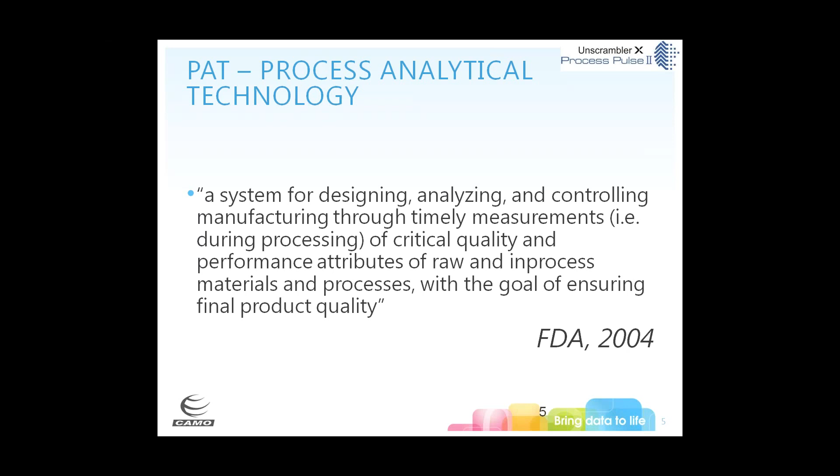If we look at that definition, it is actually quite wide, because it's saying that we are going to control both the process and our input materials and look at them as we are doing our processing. So if we try to make a picture out of this, this is how it can look. We have our process, which could be anything really. It depends on your industry, on your context. Into that process, we have one or more input variables going in, raw materials. The process is happening, and it could be heating, mixing, whatever it is. And that is, of course, influenced by your process parameters, in addition to any environmental factors.

And as the process then is progressing, we will get an output result or a product, and that product is really what we are interested in, because that is what we can sell on or pass on to our customers. And of course, then it's key that that output product has the right quality. And right quality, it could be anything. It could be purity, it could be something about consistency, it could be surface properties. It really depends on what you're making here.

But during this processing here, we obviously want to measure. We want to have some sort of data which is telling us about what's going on. And those measurements, they could be on the raw materials themselves, or it can be on the processing vessel. And using those measurements, we then want to have a handle on the quality, which means that we want to control the process and also to some extent have awareness of what is the quality of our raw materials, so we can actually adjust the process to ensure that the output quality is right.

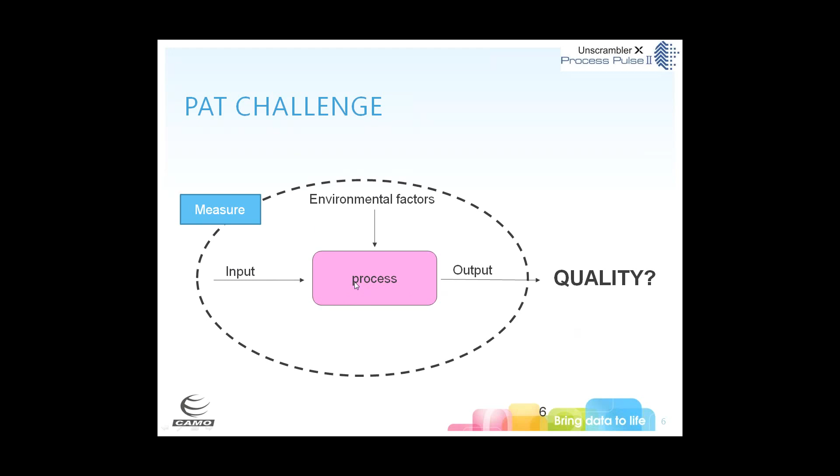And this is equally generic as the definition, I think, but it's sort of the challenge we're looking at. And if it's a batch process, if it's a continuous process, whatever, it's actually the same picture we're needing to understand or needing to address. And of course, this PAT, it's nothing new in its own right. This process analytical technology, it's been around for quite some years, and depending on industry, it's been more or less widespread. But this means that there is a number of different successful examples of PAT implementation. And in this slide, we just have a couple of them listed.

You could think about moisture control. A lot of industrial processes, they are relating to drying and getting the right moisture of the materials. We could think about things like blending uniformity. That is very important because, if we are thinking, for example, pharmaceutical industry, and we are making tablets, say, we need to ensure that the active component in each tablet is the same, so that the patient is getting the right dosage from each dosage form.

Another example from the pharmaceutical industries, it's about the quality of the tablet, call it tablet hardness. And of course, that's important because it has something to do with how durable our tablet will be. We could also think about, depending on what we're making, crystallization processes, which we might need to control because of the quality requirement. And it could be standard chemical reactions, which we just want to monitor to ensure either that our yield is where it needs to be, or that the purity of our components are right.

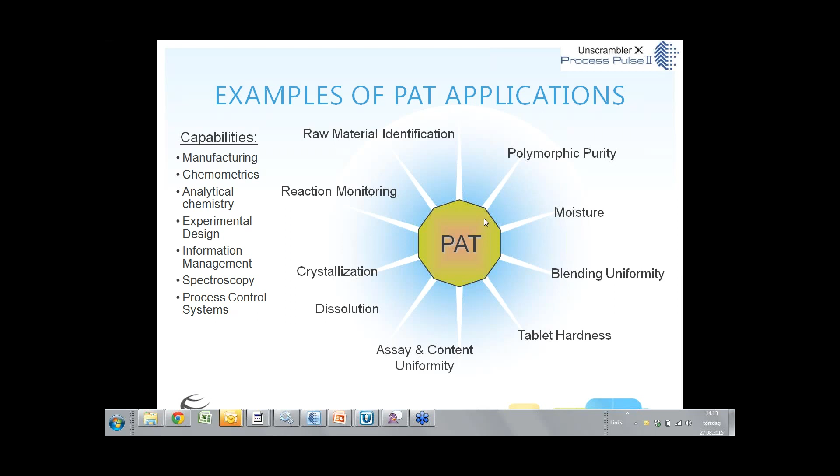Okay, so if we then move on to an example, it's a petrochemical example, but it illustrates the sort of opportunity we have with PAT very well. Because what you see here is that we have a couple of variables, which is reflected in the scores here. And we see that the scores, okay, they are high, but they're still inside the limits. This is now the upper left plot.

And it's moving along the upper limit, and then it starts to cross the upper limit and moves out of the upper limit. And we get a peak towards the end of the plot or towards the end of the time series. And this is then, when that peak is happening, that is when we are really seeing it in our manufacturing operation, that this is something going wrong here. And also, if you're looking on the score plot upper right, you see that that's where we're really moving away from our ellipse. And that ellipse is, of course, describing the normal operating region. So at that stage, it's easy to see that something went wrong.

But if we, in hindsight, analyze our data, we see that if we had reacted when our scores value were high and starting to approach the upper limit, then maybe we could be in a different situation, and maybe we would be able to save this batch or save this run, rather than having a situation where everything is moving out and we're getting a big problem.

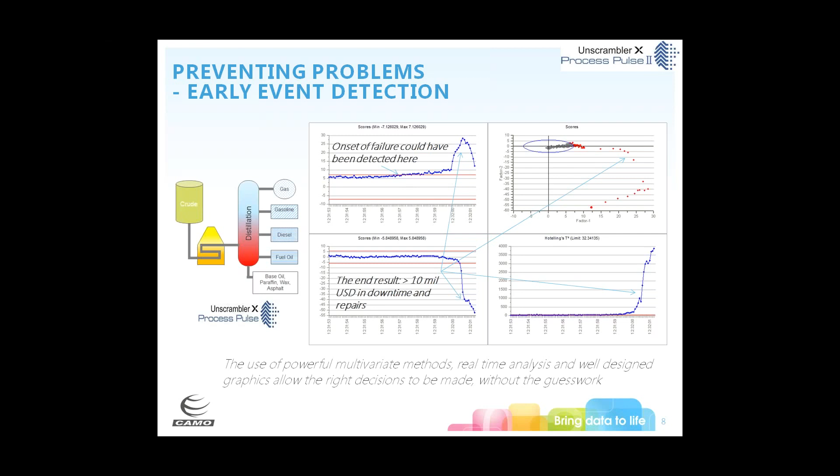And of course, the idea then is that if we had a PAT system which was measuring as we were processing, and we were able to take advantage of the measurements coming from that system and feed this information to the control system already at this stage when we're crossing the limits for the first time, then we would probably be able to do something. At least we should be able to stop the reaction or stop the production to avoid that things are developing maybe into clogging or something dramatic, which takes a lot of effort to fix.

So if we think about PAT then, it's sort of easy conceptually because I showed you the plot initially about input, the processing and output. But when we start to look at this and when we try to actually do it, there are some challenges popping up. And those challenges, they're actually spanning the whole range of skill sets which we said was required for this PAT method, because you can think about the PAT measurement system.

And the first question then, of course, is to have some understanding about what measurement system should we actually be using, because we need to know something about how we can measure these properties of interest. We need to know something about what will be feasible measurements for our context. And of course, we need to think about how we should handle the data coming out of the measurement system.

When we have the data, we need to think a little bit about how are we going to use the data. What models are we going to use? How often are we going to maintain those models? And how reliable are those models actually? Because a lot of models, they might be just qualitative in the sense that they are giving us an indication, while other models, they can be very quantitative. So they might give us the precise yield or the precise moisture in our process or in our context.

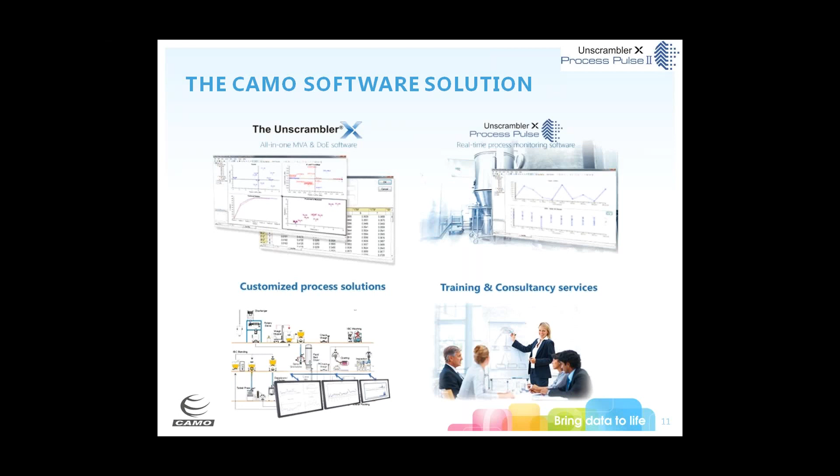The vision we have then is that all of these products, or both of them, shall we say, are working together to enable us to close this circle of, we call it the circle of continuous improvement. You will recognize it maybe as quality by design, and it's also fitting other data-driven methodologies such as Six Sigma or lean manufacturing and so forth.

The starting point then is that you have some data in a historian, in a spreadsheet somewhere. You take those data into Unscrambler, and then you can build models. And if you get some models which are of interest, then you can use these models. You can either use the models directly in your instrument, so as you are doing a new measurement, for example, you are getting a prediction value instead of the spectral data.

Or you can take it back into the process and run the model in Process Pulse, and thereby ensure that you are getting, again, prediction results as you are running the process itself. And that is then put on the plant floor, and that's generating more data. And you can start to think about updating your models if they need to be updated.

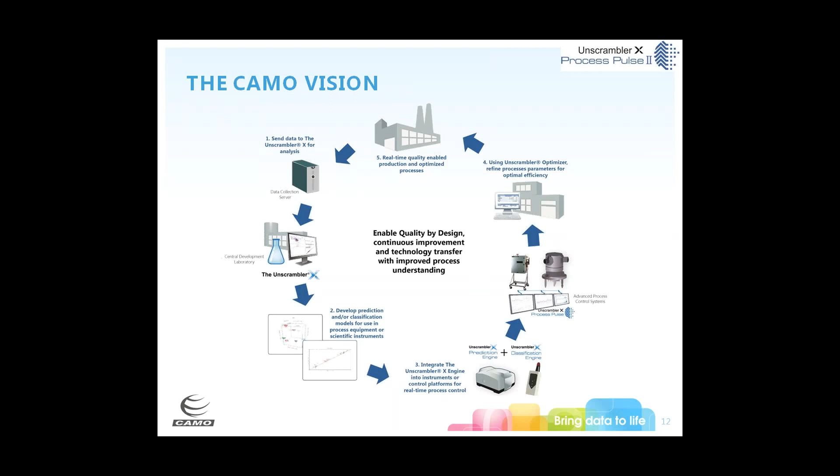Or maybe as you are generating new data, you find new relations between your process parameters and the quality of the product, which means that you can create new models and you can start to iterate towards a much better process. You can increase the process capability in your processes and so forth.

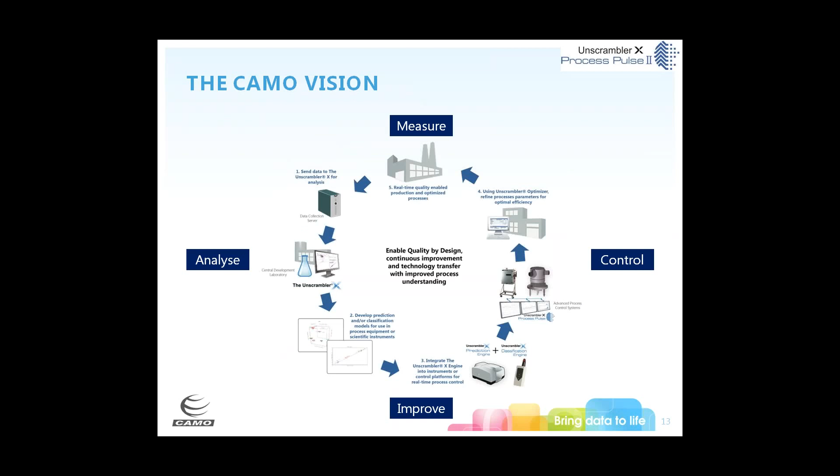And if you put the Six Sigma or the DMAIC on here, you see that it's the cycle of measuring, analyzing, improving, and controlling. So, as I said, our vision is to provide you tools which help you to do data-driven manufacturing, in short. It has different labels, but it's the same thing, which is the ambition here. Okay, that was sort of the CAMO vision.

And the next one here is Process Pulse itself. In order to say something about Process Pulse, I think we need to give you a little bit more background on the idea of the product. In short, it's all about running models in real time, in the environment where your action is happening. You can apply any models you are able to develop in Unscrambler, such as regression, classification, projection, hierarchical models, and more.

And that gives you the opportunity then to assess the state of your process. In some industries like pharmaceuticals, they have this expression which they call the design space. The design space is basically where you want to be. It's a description of how the process should behave if it's running as it should. In that situation, we can assess the data coming in from our process and compare it to the design space, which we know is the good situation.

And if we are seeing any issues, like I showed you in the earlier plot, we can identify those, of course, and then we can report it, or we can take action and ensure that those issues are not allowed to develop in any way. And of course, this is fitting straight into different continuous improvement programs and CAPA programs, so there's no conflict there at all.

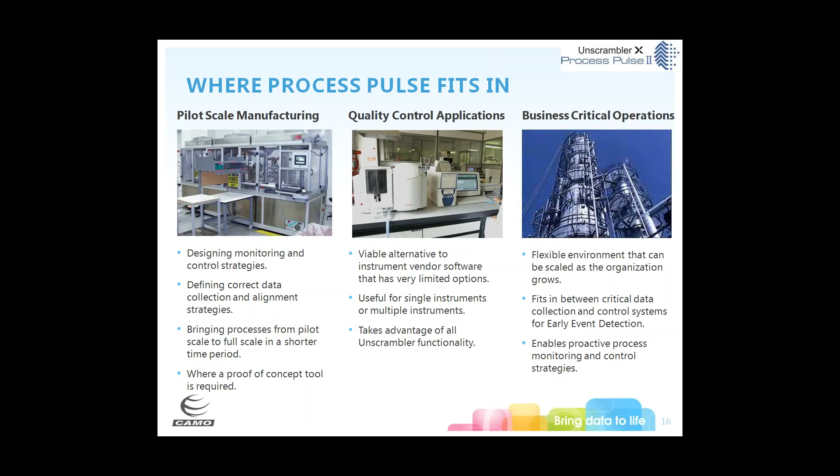And the idea then is that Process Pulse is able to connect to these different data sources, pull data or receive data, and then run those models and create results for you, which can be presented on a screen or stored in the database itself. And that means that in many ways you can regard Process Pulse as a data collection system as well as a model execution system. And that gives us a sort of stepping stone into this PAT system world.

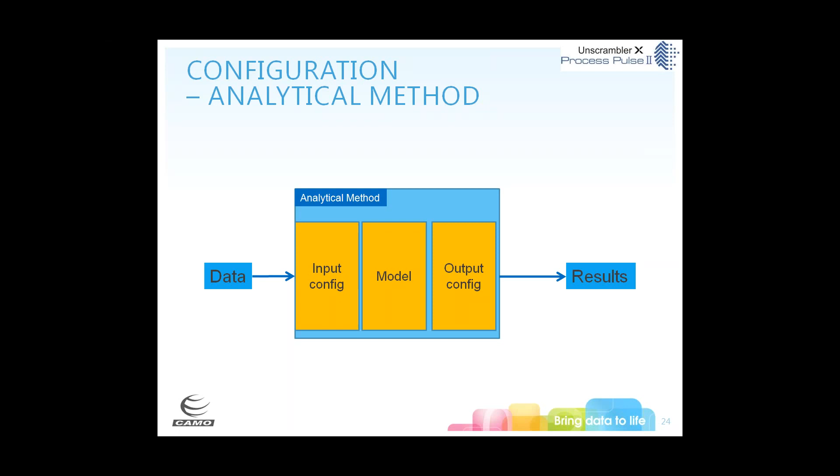And this thing here, which, as I said, I call maybe analytical method, is what we call a configuration. So when I'm talking about the configuration later, it's setup of a data source, model, and output specifications. Okay. Then I'm going to try to switch screens. Okay. And I think you should be able to see my screen now. Just put that on top to be sure.

Okay, so this is Process Pulse login screen. Now, not much to say here, but you see we have some feeds on the left-hand side, and it's not very meaningful what you see there now. But the idea is that if you want to have a communication to your team, you can put in the feeds here, and then you can update your team. So that's sort of the idea behind it. Let's log in.

This is now the starting screen of Process Pulse. And what you see here is that in the background no configuration is selected, which basically means that my system isn't running. You also see towards the top there, we have three main areas of buttons. We have the operation buttons, the review buttons, and the settings buttons. The idea now is that operation is relating to what you do in Process Pulse. Review is relating to what you do after you have been running your process in Process Pulse. And the settings, that's basically setup of the system.

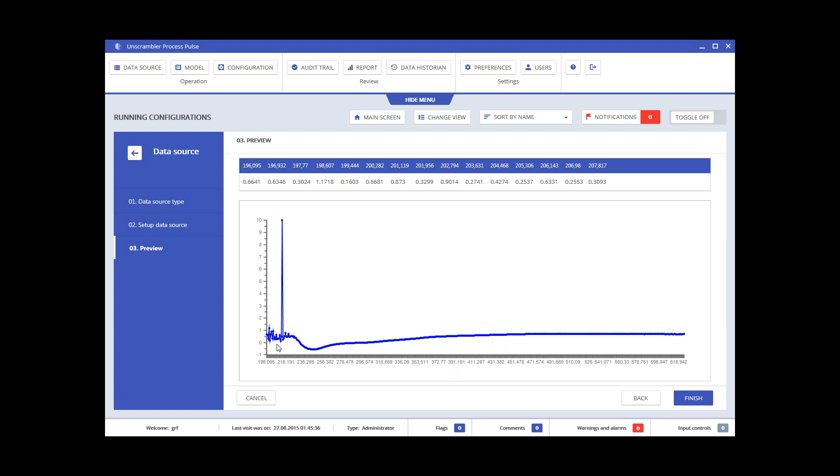So if I just say finish there, you will see that my demo data source is put on the top here. It's a JCamp DX, and this is the link I gave to that data source. So then I've set up my data source, and that's, we think, easy enough. The next thing I need to think about is models.

And here you see that I have a similar situation to what I had before, that I have a listing, and each of these listings are models. I'm getting information about when they were uploaded, and you see that I have been preparing myself yesterday and today, uploading all of these models. And you also see that the user who's been doing all of this is myself. GRF is my username on this system.

We have something here which is state, which is basically enabled and disabled, because we can have a situation where someone is telling us that this model is not ready for use in production, so we can disable the model. But that's something I won't go into. Here we have what we call a download button, and this relates to third-party models. If I have some models from a third-party calculation engine provider, then I can download my model.

But in my instance, what I have is Unscrambler models, all of these. So let us just push this model into Unscrambler. And now I'm getting an instance of Unscrambler opened, and I'm getting the model sent to Unscrambler. And then I can go in and have a look at this model.

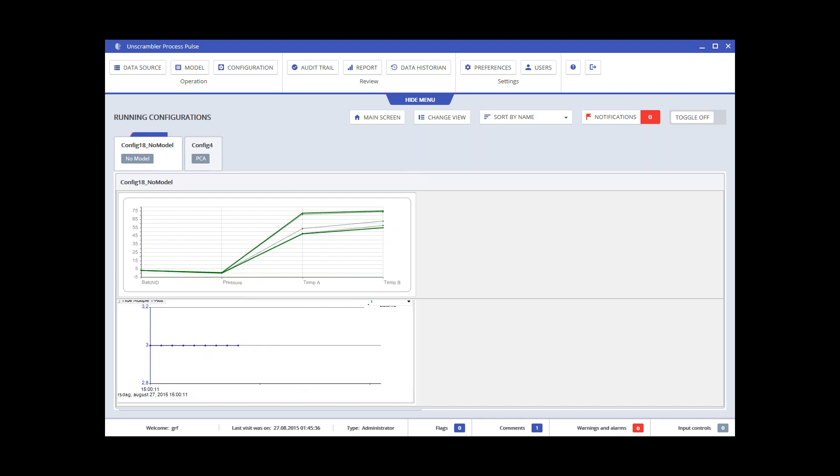This one here is actually not that exciting. It's just showing me some data, more or less raw data. So let's see if we have something a little more interesting. Let's go down and do the PCA, which we had a look at. We're not changing the tags here because it's not that relevant. And now you see that I'm getting these two next to each other. That gives me an opportunity to look at both if I'm interested in both, or I can say no, I'm not interested in both, and just keep it in the background. That all depends.

One thing we can notice here is that in my configuration, I have a couple of variables. Let's just get rid of that batch ID, which is not that interesting. These variables you see are pressure, temperature, and then something called multiple A and temperature ratio. Those last two are variables which I have configured in my setup, and they are equations relating to my raw data. And I want to just show you that.

So let's go back to configuration and stop it. I can confirm that I want to stop it. Now you see that the date here is the date when I started it, and as I'm stopping it, it's going away. But let's go in and have a look at the setup which I wanted to show you. Here I'm saying that it's okay to up-version. I'm just going to click through because this is not of interest just yet.

Here we have it, because here you see that I've defined two column names, called multiple A and temperature ratio. So if I now create a new variable, which is multiple B, I can go in here and create a formula. So let's do temperature B.

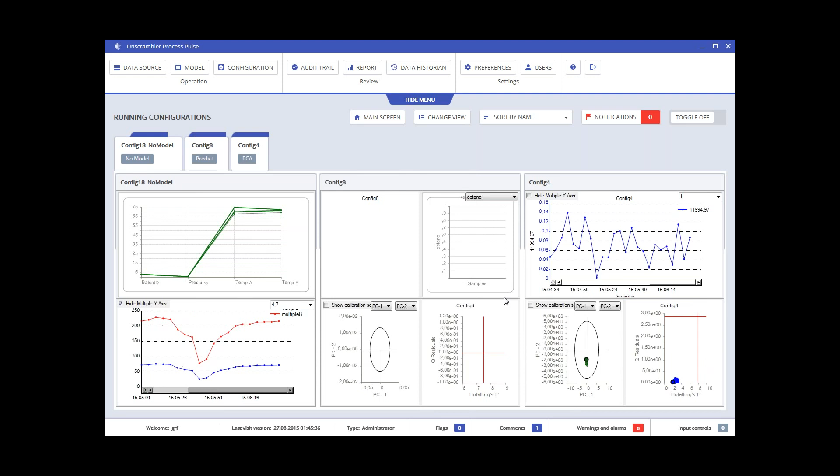Okay, so let's move on, because for the configuration, we can also have a look on prediction. So let's do a prediction here. This is a PLS model which we have. It's actually octane numbers. Let's hide the other ones. And here you see now that my card turned amber, and also I got an alarm down here. And it tells me that for this configuration, there are some samples which are outside the Q residuals limit.

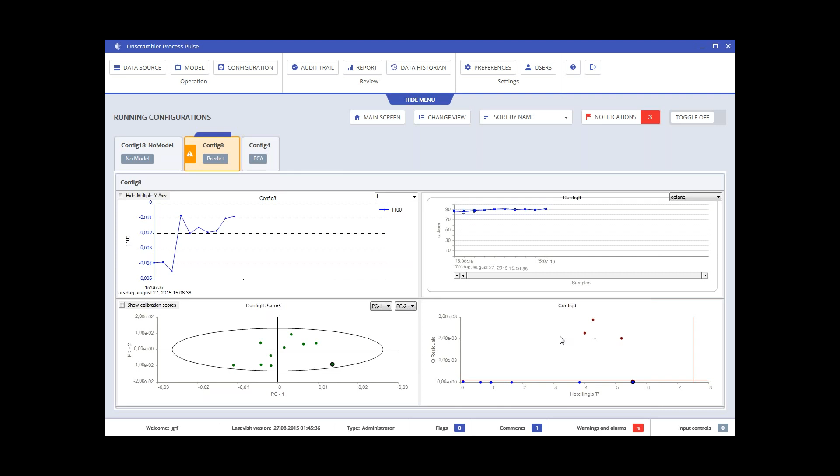If I look on my influence plot here, you see that I have these samples which are outside the Q residuals limit. If looking on the scores, they are not really outside the ellipse there, but they are outside on the Q residuals. And if I zoom in here on the predictions, you see that I have my uncertainty limits, which are certainly big for these points which are outside my limits.

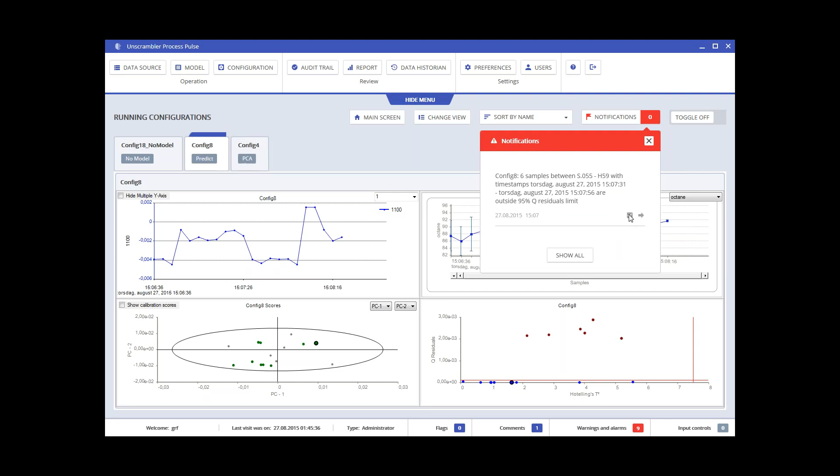And if I was monitoring my process using this model, then I would get some deviation here, and this would tell me that something is amiss, something needs to be checked, and somebody really needs to do something. And to ensure that your operators are alert, we have put in this notifications list, because here the same information which is coming down in the alarms tab is noted, and the operators are supposed to confirm that they've actually seen what's going on, and then you see that the counter is going down and everything is good again.

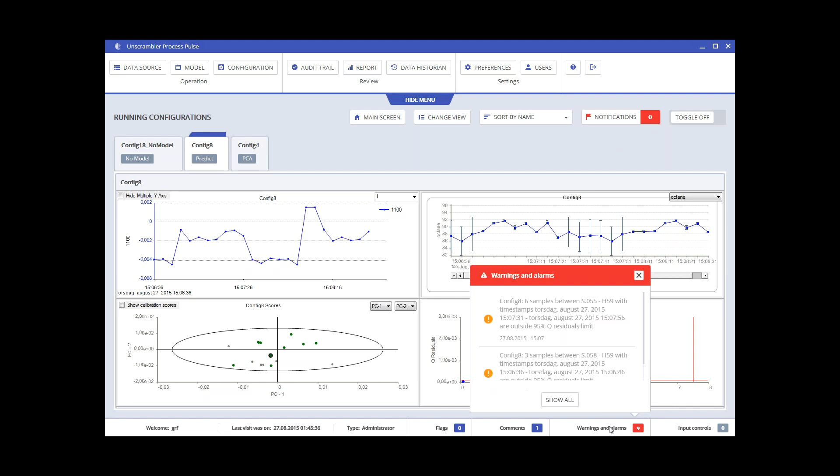The alarms, they are not going away from my tile here, and they're also going into my database. So if I now go here to configuration, I can stop this, for example, like that. I go to my data historian, like that, and then this one which we were looking at, that was config 8, I think, yeah. And then it's revision number 1, and I'm going to just take data from all the time.

You could, if you really wanted to be specifying this, specify the time as well here, but it's not something I'm going to do right now. I'm going to increase the number of records, doing my search, and I'm getting my results. And now you see that I'm getting a results table where I have predicted values, I have deviations, and I have some scores, residuals, and the timing, of course.

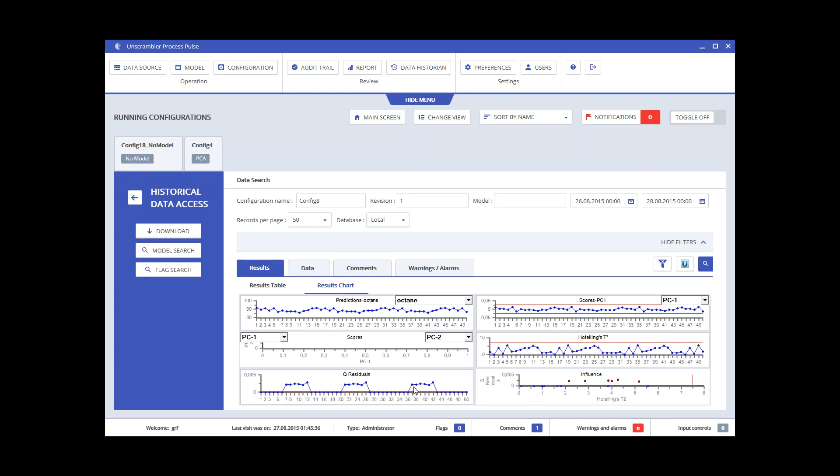I can also go and have a look at the charts themselves, and I can explore what was happening. And you see this Q residuals is sort of recurring. This is, of course, because I'm running my data in a loop, so it's the same data which is coming through again and again. That's the explanation for that. But okay, then I can look at my data, and I can go in and look at these different data points.

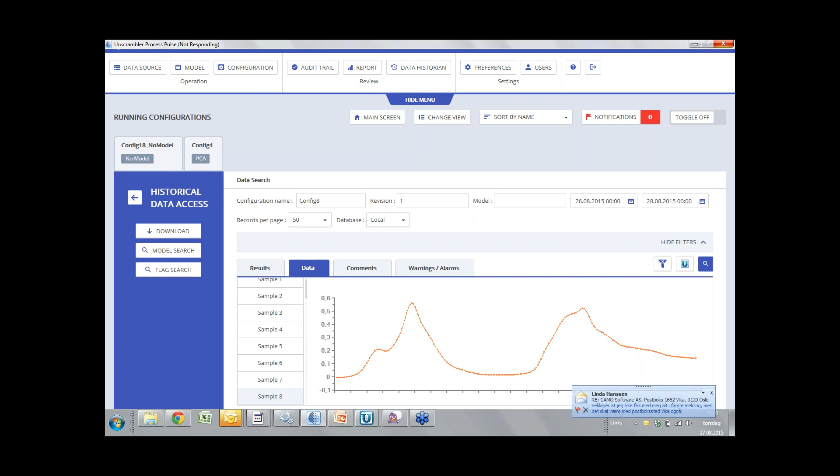But also, as we talked about, we can have a look at these warnings and alarms. On that warnings and alarms list, we are listing all of the warnings and alarms which have happened during the running, and for me that's quite a lot. But when you look here, you see that it's 6 samples between this and that. It's 3 samples, then it's 6 samples, and as I'm scrolling down here, it's 6 and 3 all the time. Again, that's relating to me running these data in a loop, of course. But that's the information there.

What I've done now is that I've gone into the data historian and I've picked up some data which is relating to my process. So if I now go to my Unscrambler, I can export or I can push the data to Unscrambler. And then in Unscrambler, I can have a look at the data themselves, and I can see whether there's something I need to change in the data. Maybe I need to change the model or something like that.

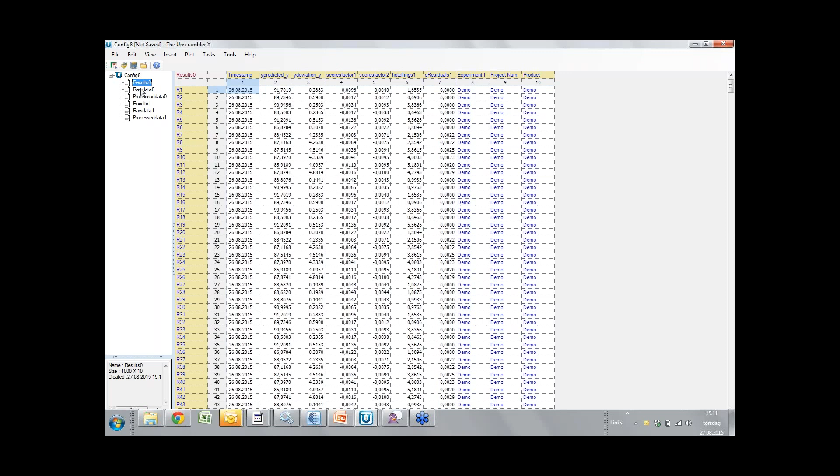And my data, as you see here, they are time-stamped. And also we have these tags which I was putting in. I was putting in just demo for the tag, so not that much information, but I could use it. This node here is the results node, and then I can also go in and look at the data node itself. And this is the spectra; what I was looking at there is spectral data. And same as for the results node, at the end I have my tag names. So if I later want to do some sample grouping or something like that, I can do that.

Okay. Let's close that. Go back here. Audit trail. I haven't spoken about that. If I have a look in my audit trail, going to the last part here, you see what I did previously when I looked at the notifications and acknowledged them. These samples were acknowledged, and you see that I have the user ID for who was acknowledging them, and I have the timestamp over here.

And if I now wanted to, maybe I can do a search. Maybe I can do config 22. Then I'm getting up all of the activity which has been on config 22. And as you see, this hasn't been that exciting. I've been starting and stopping this config a little bit, but not much. What I was just working on was config 8, and here you see that it's more.

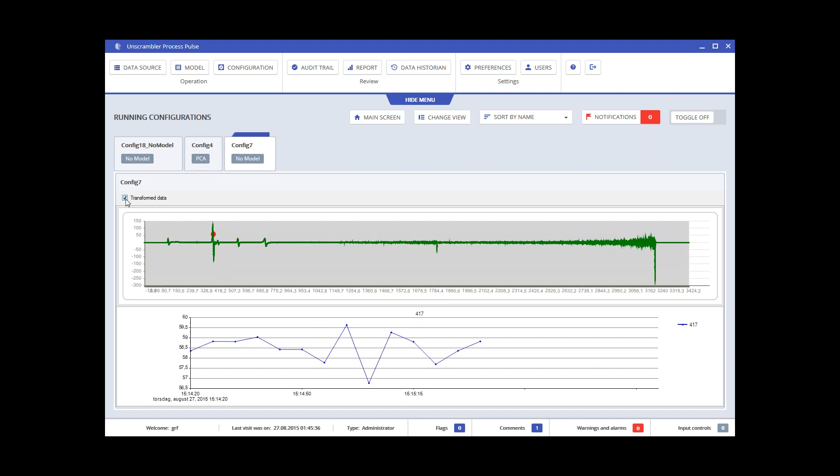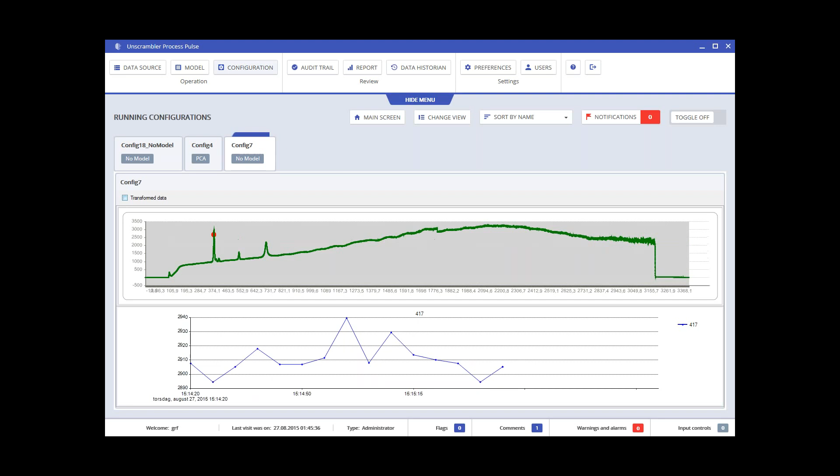The transformation I did was just a simple Savitzky-Golay derivative transformation. But I can change that. It could be different types of pretreatments. Sorry, I turn it off there. But if I go back to my configuration and I just stop this, I confirm the stop, and then I can go and do a review of that configuration. Yes, I'm accepting that there might be a change to it. Here is where I have my derivative, and here you see that I've done a first derivative and some smoothing points. But actually I could do some other pretreatments as well.

This list of pretreatments is, you might think, quite limited, but we've done this on purpose, because we want to give you the opportunity to have a first look on data, and these ones are typically of interest. But if you want to do a pretreatment for your models, then of course you will do that in the Unscrambler itself as part of the model building, and the options there are much more wide, and you can really do all of the advanced pretreatments you want. But if you have a data source which requires a special transform in here, then you should talk to us, and we can see what we can do.

You could also do, it's not going to be that meaningful as such, but you could do things like baseline in addition to the derivative, just to show you that, and then you can change the sequence and all of that. So yeah, not going to talk more about that. Let's think here then. We have shown you no model, so we can take that one away. We have shown you PCA, so we can take that one away. Maybe now we can show you a little bit of, should we call it a case study?

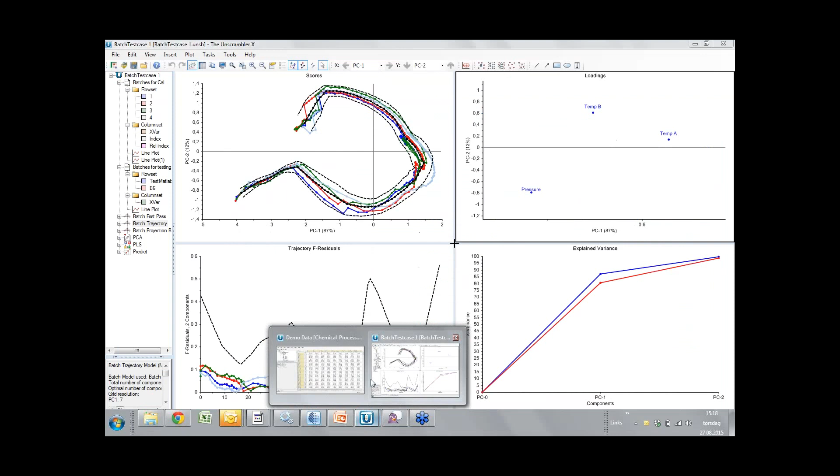If I go to the Unscrambler just to show you a story, I'm not going to click through all of the details here, but I'm just going to put it into a context, because what we have here is a chemical process which is running with a number of different variables. It's not that important what these variables are for the purpose of my discussion, but this is the data set. And through the data set, we also have some settings. You see that it's more or less an experimental design with different states. We have state 1, state 2, and state 3 with the state variable. And then we have a calibration set here, and a prediction set here. So this is all set up in the Unscrambler as part of the data analysis.

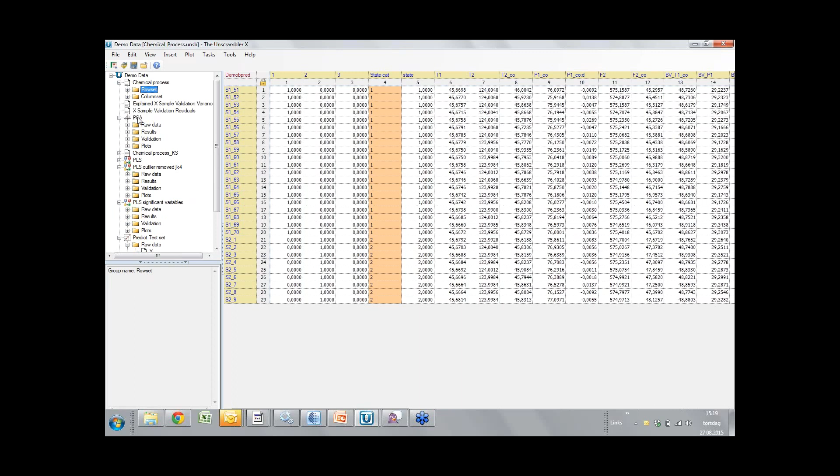When I do my analysis, maybe the first thing I do is a PCA. In the PCA, I see that, okay, there are some groupings here. I've done some coloring now on the quality variable. And maybe I should mention the quality variable for you, because that's this one here. We call it luster. It's relating to the surface properties of the product which is made.

But if I'm coloring or grouping according to the luster levels, it doesn't look like it's much related to that. So you see, this is my grouping variable. So let's increase the number of groups. I can apply and it's okay. Well, maybe as I'm increasing the number of groups, I'm getting something here which is relating to different levels of this variable. So maybe there is something there still.

My variables, they are over here, of course. These are the scores and loadings, and this is what it looks like. So, okay, I'm thinking that there might be an opportunity here to create a calibration model between my process parameters and the quality variable, which is luster. So I go away and I do that. And then again, this is my scores, and I can put in the sample names, take them away to clean it up. And we have the variables over here, with luster showing as well.

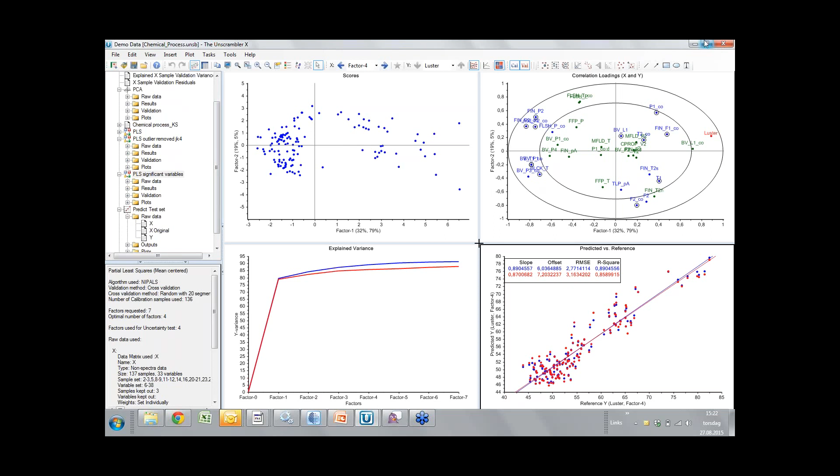In the plot now, you see the variables which are used in the model building. They are blue, and those which are excluded are green. So we can actually see what they would be like if they were part of the model. But this is the model which I'm going to use. I've saved this and uploaded it, and it is this one here, called config24. So when I then move to running this configuration, here you see, first, that there are some samples outside.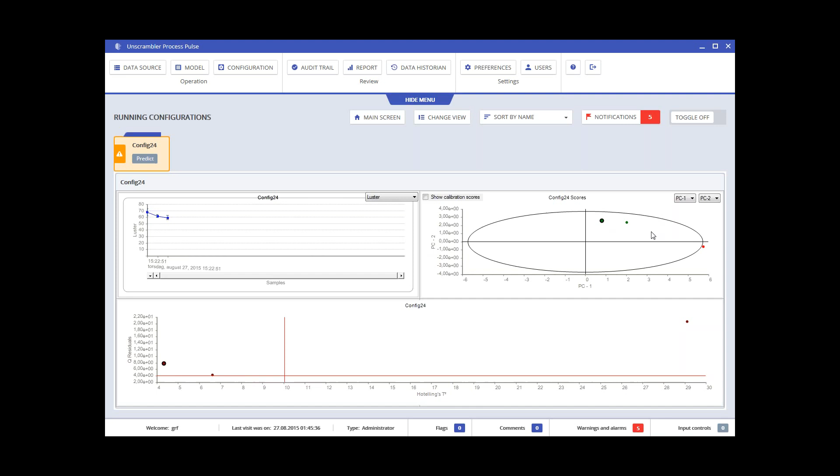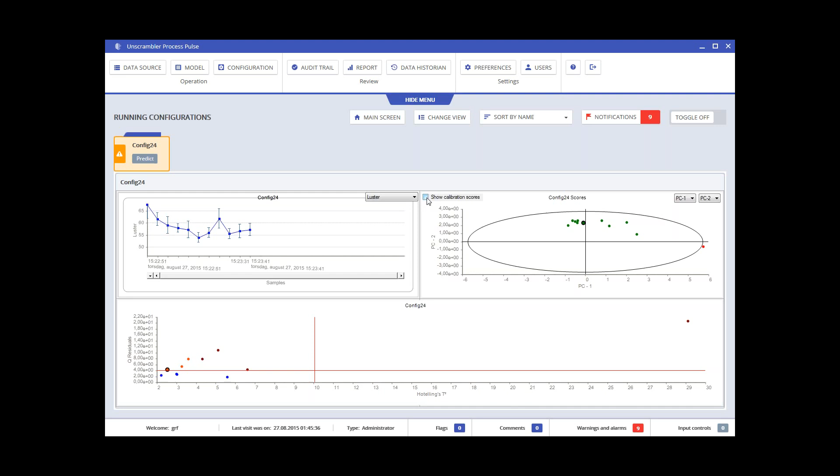And this is an important observation, because what I'm going to show you here is quite a lot of samples which are outside. Let's zoom in on the predicted value, and you see that it's running, and everything is good apart from these many samples which are outside. It's the same situation as for the octane data: in my scores plot things look okay, but something is really going on. So the data I'm running through the model should give you concern, because something is amiss. This gives reason to believe that either I need to go back and do something with my model because the context of my new data has changed, or something else is really going on.

What I can do then is that I can of course compare it to the previous data. I can also drill down to what is the data, and you see that I'm getting all of my variables. I'm getting the values for the variables, and I also can look on these min, max and mean variables. Well, let's make that bigger.

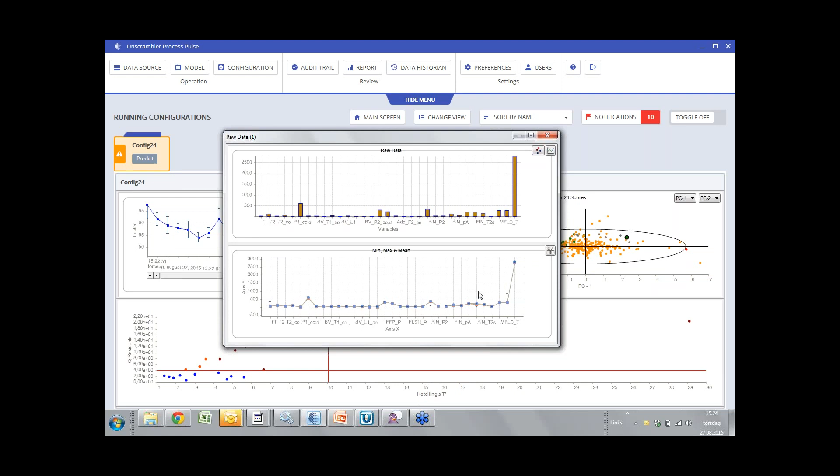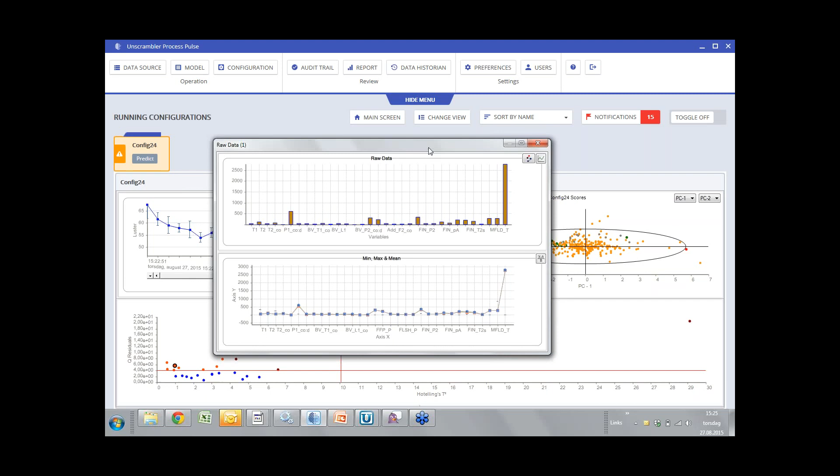We see that here we have a variable which is really at the edge of where we've seen it before, and there's one here as well. And we can start to think about what this means in my process. I won't really go into the details of that in this presentation, because what I've tried to do is give you an overview of how the process pulse can fit into a process monitoring regime. But if you are interested in more details or talking more about the methods, just get in touch and we will work something out.

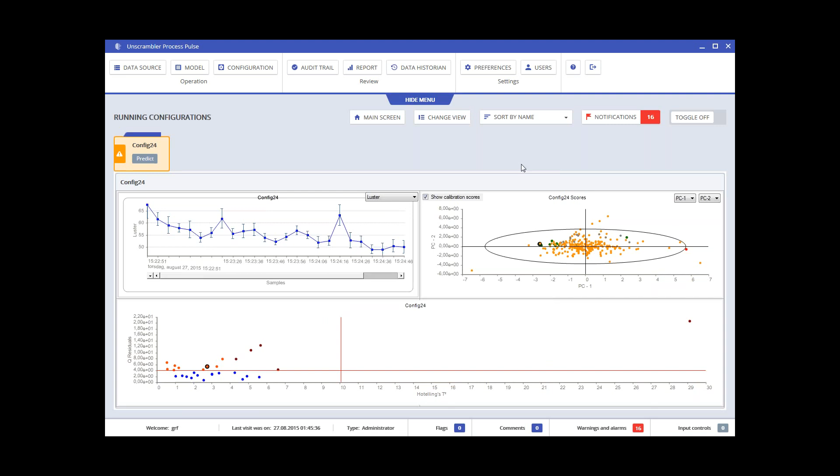Then I think even if we're early, I was planning to give a lot of time for questions. So the last thing I'm going to do now before looking at questions is to just show you these preferences. Taking note now, of course, that even if I'm moving around in different regions of my process pulse, the cards are always visible. So if I suddenly got a situation with something going outside my statistical limits, then my card would be flagged up like you see it now. My attention would be drawn to that, and I would go and have a look at it.

In the data source setup, it's not that exciting. You see that I can do something about the layout. But in the model one, this is where I told you about these tags, because I had 2 tags for my models, but here you can go in and fill in the tags you are interested in. And if you want to make some of them compulsory, you just tick the box and that's done. The tags can be text fields like I had, or they could be roll-on lists. For example, if you have 3 products which you are running models for, you could have those 3 products on a roll-on list.

It's the same for configuration, because here, if I do next, oops, didn't want to do that. Let's do like that. If I do next, you see that I have the same opportunity to extend my list, and also you see that I made this experimental ID compulsory. The product and project name I can change if I have other tags I want to attach.

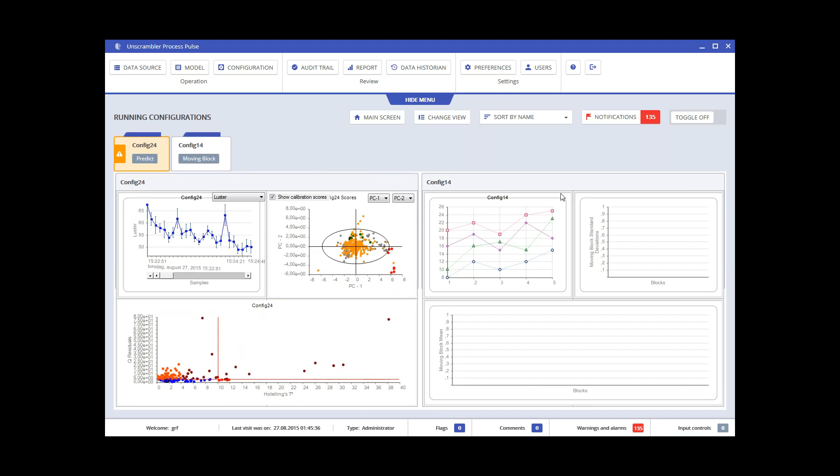Can you show something using moving block in Process Pulse? Yes, I can actually do that. Let's see if we can hide this one here, because I have a moving block set up, which is config 14. So let me just start that one, the same startup as before. And you say that you use moving block for blending, and I think that's a really good idea. It's probably what I would be doing as well. So that should be working.

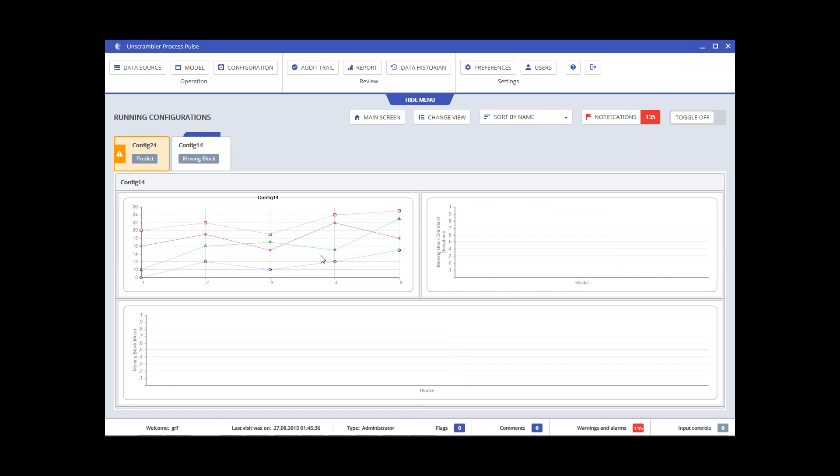This moving block takes some time because my simulator is set up to give a measurement point every 5 seconds, and I can't really recall how many points I had in my block, but obviously I need all of those points before I can use this. And what you see now is fairly straightforward, because you see the spectra which are coming in, and we have the moving block standard deviations plotting in the upper right, and the moving block mean plotting in the lower plot.

The idea now is that as we are running this moving block, we should be looking for limits. So if you are doing blending, I would think that you're getting some sort of profile going from large variation to small variation, and you will be trending that, putting in a limit, and then monitoring when you are crossing the limit, and setting it up either to send the result to a control system externally, or setting it up like this, so you're getting a warning when things are coming to the end point of the blending, and you can stop your blender.

So that should be. I only have this sort of simple setup here, but in terms of using this for endpoint detection in blending, I think that will be fairly straightforward.

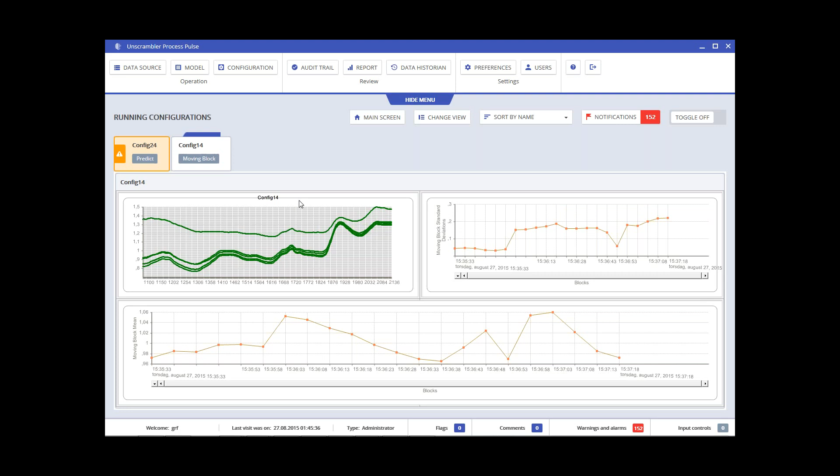Is it possible to sign configurations and/or models electronically to release or protect them? Yes, we have this approve mechanism. I don't have any really good examples of that here in my setup, but if we look at the stuff here, what will be possible to do is that you see on my list here, I have start and stop states in my configurations. I also have this approve state.

In my implementation, clicking approve just approves my config. The idea here is that you should also be asked for your logon details. And that means that if I'm eligible for approving this model, then I'm allowed to approve it. If I'm not eligible, I'm not allowed to approve it.

And the opposite way, if I want to protect it, I can click here and then I choose disable. And as I'm choosing disable, you see that this state is again changing to approve. And this means that my configuration is now in a disabled state. And this is for configurations.

If I go to models, you will see that I have the same thing. I can click my model and I can disable it. And then you see my status is coming up as disabled. And if I want, I can show them or I can hide them. So yes, there is some functionality for it, and of course, whether your requirements are fulfilled, please get in touch and we can discuss the details.